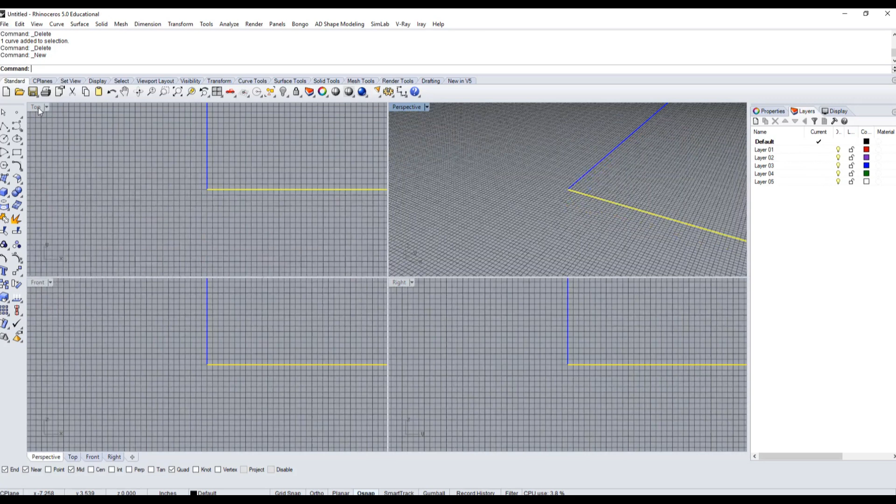I'm going to double click and work on the top viewport. I'll start by doing what we call the keyhole, which is going to be the centerpiece of my sprocket. So I'm going to draw a circle.

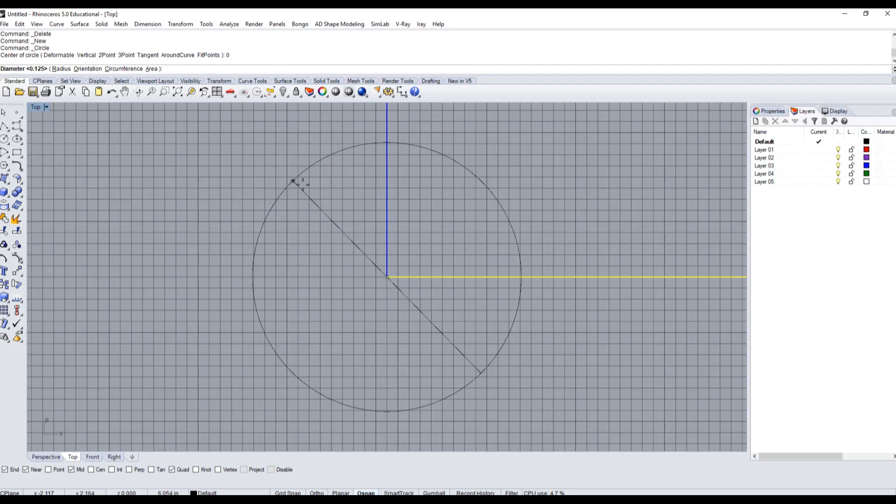I'll place it at 0, right click to position it, and now I have to give its diameter. I make sure that diameter is in bold. I know I'm working in decimals, but I can also key in fractions in Rhino, and it will understand the size.

Now for the diameter size, I know it needs to be 1/8 of an inch in diameter, so I type in 1/8 and press enter. Now I've got this diameter of 1/8 of an inch.

Now I'm going to place a point. I'll snap it to the quad and place a point here, so this point is at the quad of that circle. I'll select that point, and I'm going to use this as reference geometry, as a helping tool for my drawings.

I'm going to take this point and make a copy of it, snapping to the point or quad, same as before. I need to make it 1/16 of an inch high, so I type in 1/16 and enter. Now I've constrained the distance, so I press shift to constrain on the vertical axis only, left click to place my second point, then right click to complete the task.

Now from this point, which is 1/16 of an inch from my circle, I need to make a line that will be 1/16 of an inch wide. So I go to my line tool and start from the midpoint, choosing the third icon here, line from midpoint.

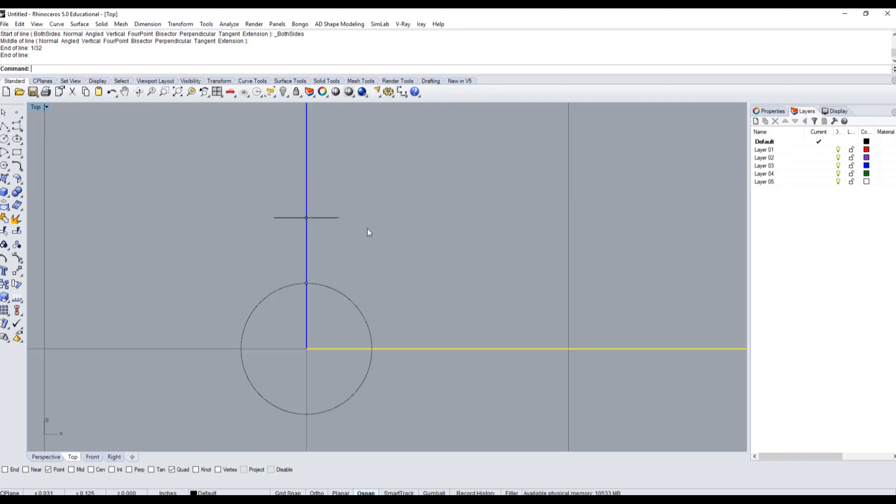I snap to point, snap to this point, and since I need to make it 1/16 wide, I put the measurement for one side, which is 1/32. Enter, then I press shift and left click to create my line. So this line overall is 1/16 of an inch.

Now I need to draw a line that goes from this point all the way down here. So I create a line, snap to endpoint like this, press shift, bring it down, left click, then right click.

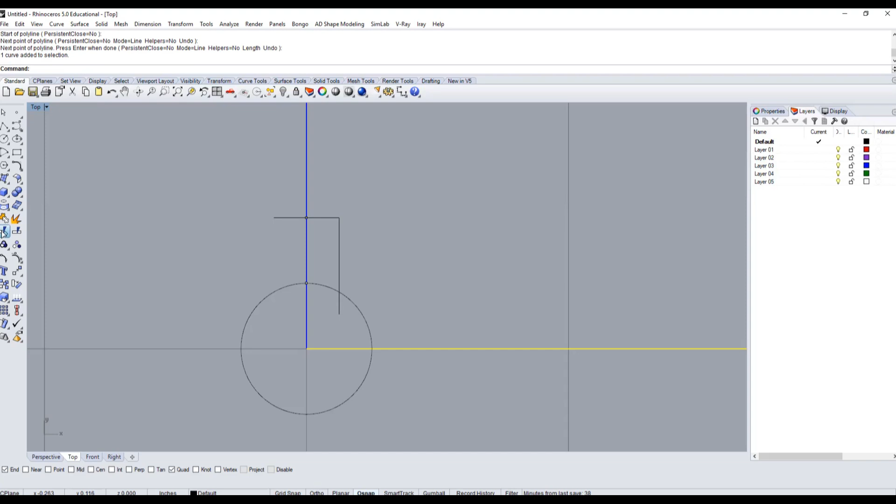Now I need to trim this line, so I go to trim, select my circle, enter, and then I remove this part.

Now I know I need to make a symmetry, so I need to send this to the other side. I go above my move icon and pull out the transformation toolbar, where I find the mirror icon. I make sure I snap to endpoint or point, grab this point, press shift to constrain on the y-axis, and left click to make a copy.

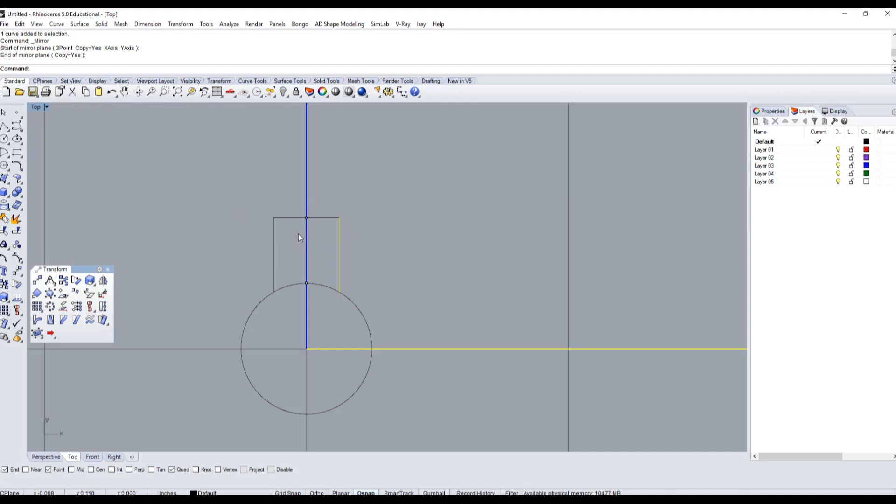Always make sure that copy equals yes. Sometimes it could be copy equals no, so you won't be able to make that copy — you'd just pass the original to the other side. So make sure copy equals yes.

So I've got these two lines, and I can remove what's in between here. I click trim, select line 1 and line 2, enter, and remove what's in between. Then I can select them all and make a join.

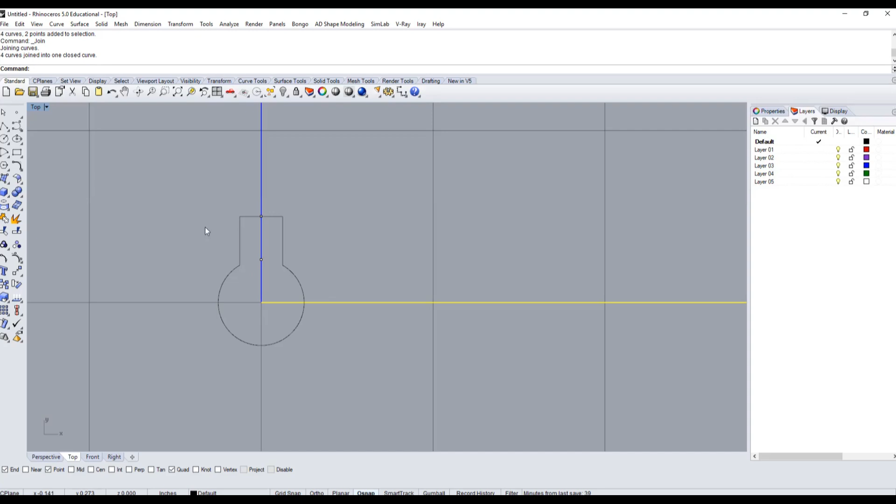So now I've got 4 curves joined into one closed curve. Okay, so that's it for the keyhole. Now I need to make the sprocket itself.

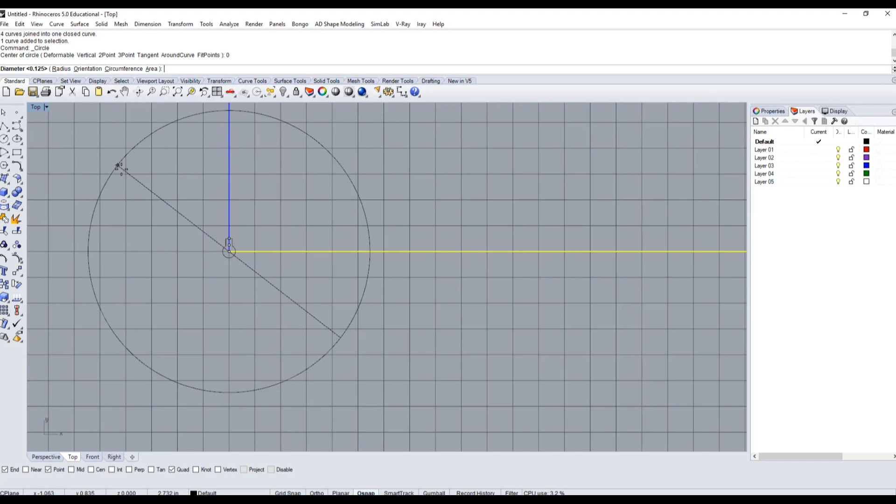I know that the sprocket is 1 inch in diameter. So again, I go to my circle. I want the center to be at the origin, so it's 0. Right click to confirm, and I need to type in the diameter, which is 1 inch. So I type 1 and press enter. So I've got 1 inch in diameter.

I'm going to start at the very top of my circle, so I can place a point that snaps in quad like this. And I'm going to draw a line that's going to start from the midpoint, and that is 1/16 of an inch wide. So basically I'm going to be making the tooth.

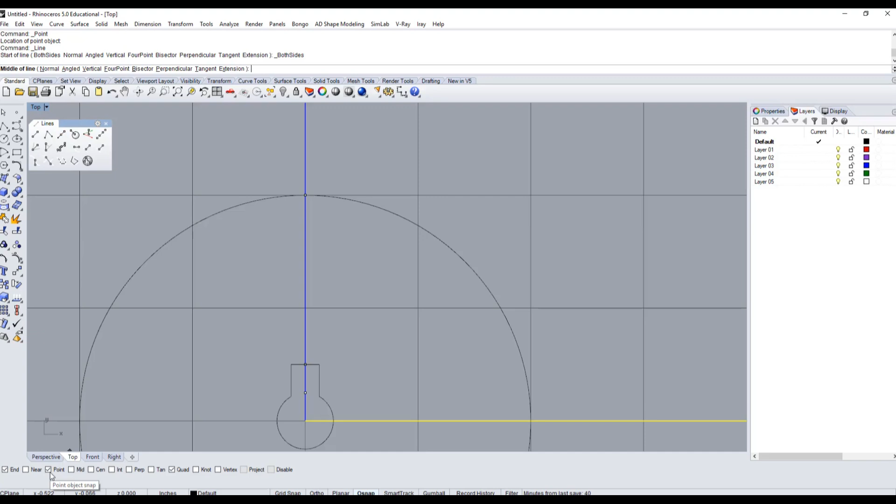I'm going to extend my toolbar for lines, and again I'm going to use the line from midpoint. I make sure that I'm snapping at point on my snapping toolbar, and I go and grab that point. And now I've got my line.

Now I need to give it a distance. I know that overall it needs to be 1/16 of an inch, but since I'm working from the midpoint, it needs to be 1/32. So 1/32, enter. Now I press shift and left click to draw my line.

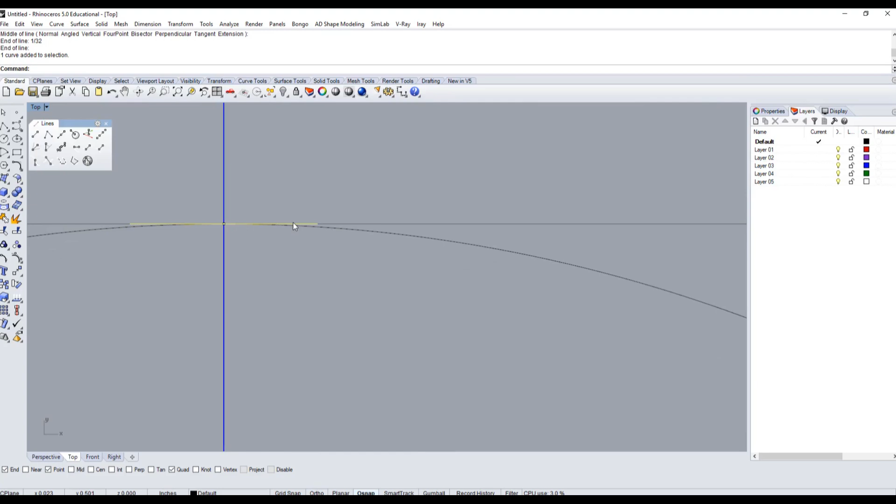It's a bit hard to see, but it's here. I can press F7 to remove the grid so that we see a little bit better. But there's the beginning, the top of my tooth. So I'm focusing on the tooth of one of the teeth of my sprocket.

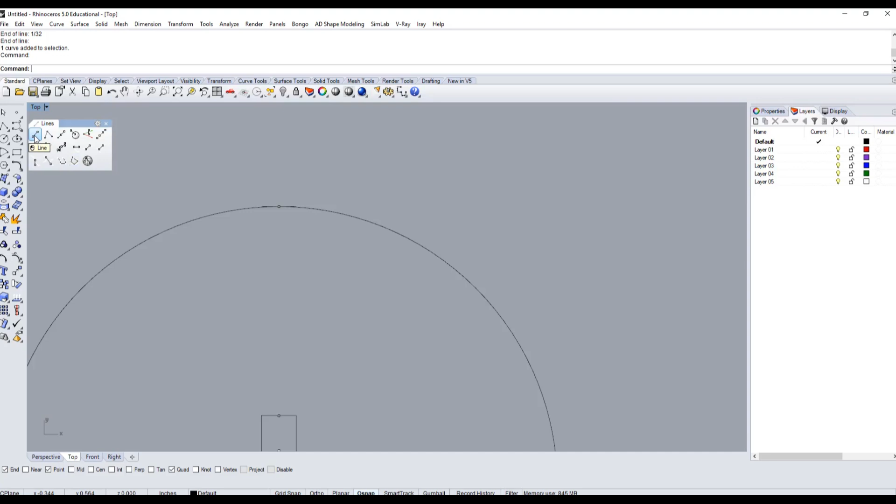Now I need to create a line that goes at an angle that is specified. It's an angle of 70 degrees, and it's also going to be 1/16 of an inch. So I'm going to use the line tool, snap in endpoint, and go and grab that endpoint here. Now I know that I need to make it go 70 degrees.

So I can use the symbol smaller than. First I just need to make sure that I'm in the proper keyboard layout. There you go. So I'm going to type in the distance first. I'm just going to say 1/16 for 1/16 of an inch. Sorry about that, a bit of a problem with my computer.

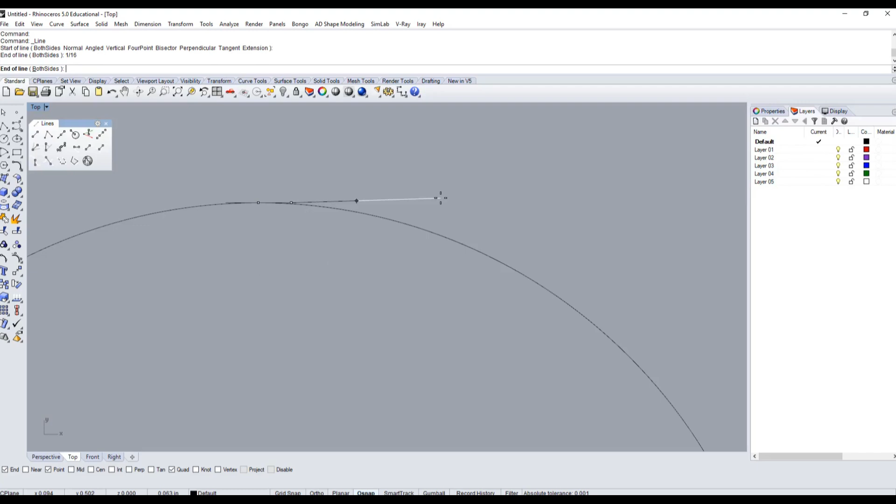So I just type in 1/16 of an inch and I right click. Now I've constrained the distance. Now I have to constrain by angle, so I type the angle by doing smaller than, and I type -70, enter. Now you can see that I'm snapping to every 70 degrees like this. So I've constrained the angle and the distance, and I just left click, and there you have it.

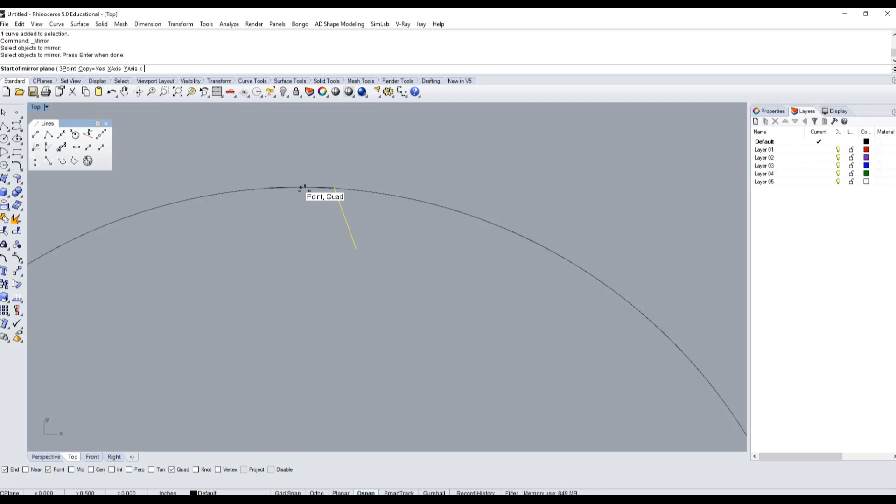I know that I have to send this copy on the other side, so it's just a matter of doing a mirror. I go back here, I do mirror, select it, right click, select my point, press shift, left click, and there you have it. So now I can select all these three lines and make join. Three curves joined into one open curve, which is perfect.

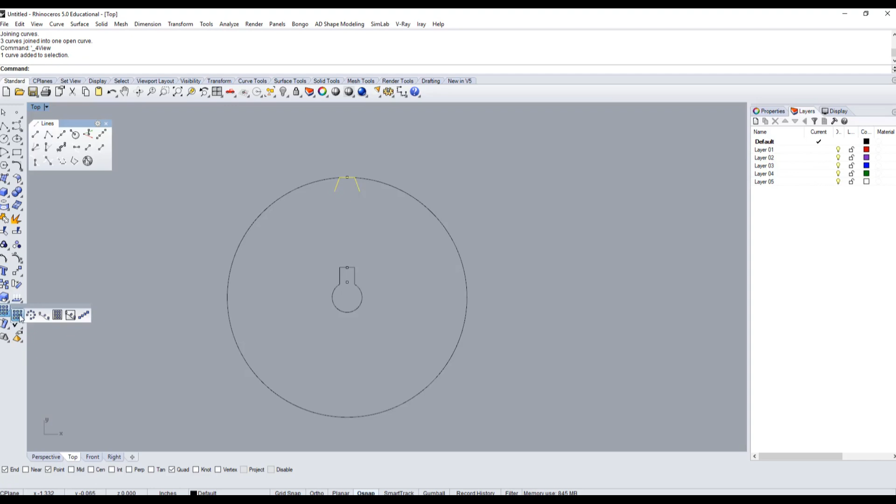Now I know that I need to make 18 copies of that tooth. So I just select my tooth, and I'm going to do what we call a polar array. I bring my cursor here, and I select this icon, polar array. It's asking me the center of my polar array, so I type in 0.

It's always the same thing, so we can see the little white dot that shows up here. That's the origin point. And I want 18 teeth, so I type in 18 copies for number of items, and I right click.

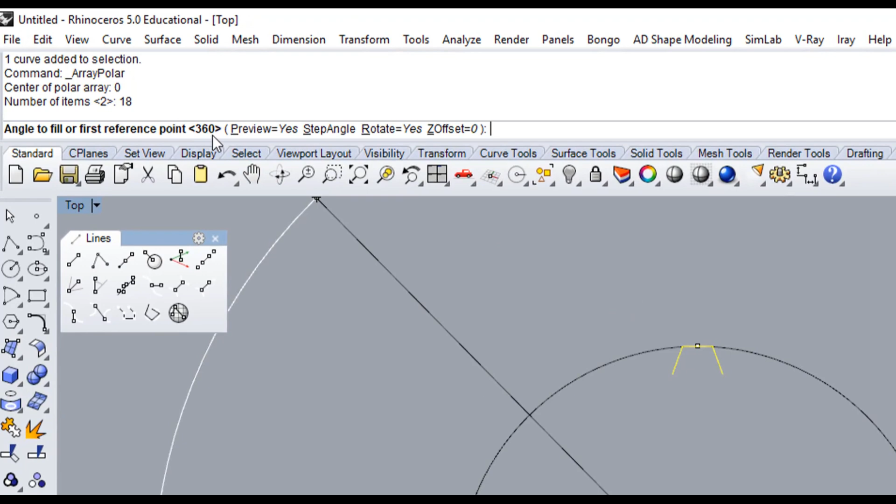I'll make sure that in bold it's 360 degrees. Make sure your angle fill is 360. Okay, that's fine. I just right click again, and I have a little preview in white. This is what it looks like with 18 teeth. I'm happy with it, so I right click to confirm and freeze everything. Now I've got my 18 teeth.

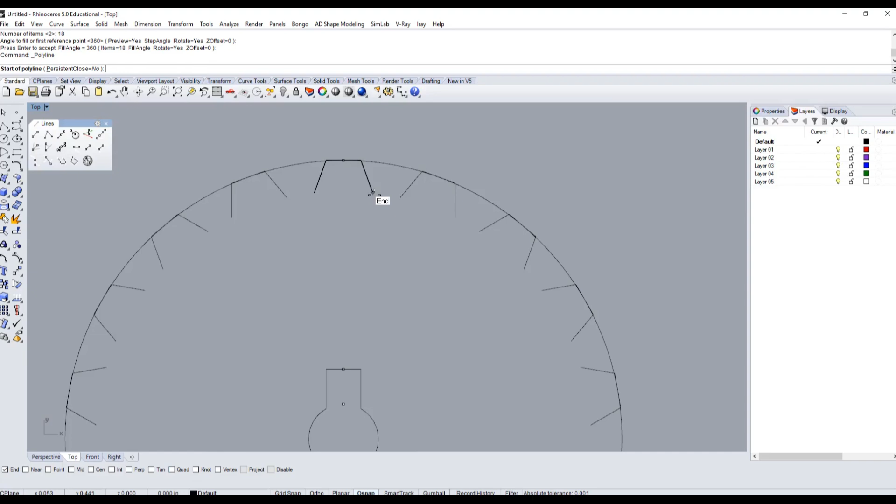Now it's just a matter of connecting the dots. I'm going to use the line tool, make sure endpoint is checked on my snapping toolbar, and I go and grab this endpoint and that endpoint, then right click.

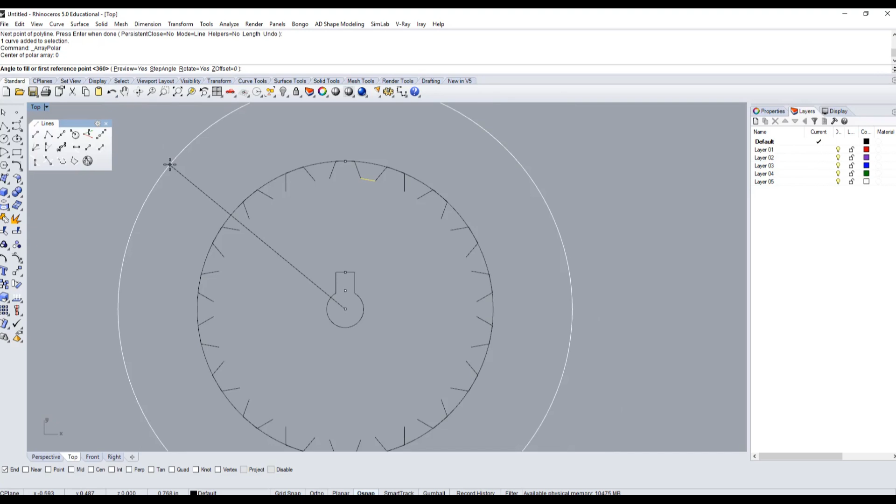Again, I make another polar array. I go back here, select polar array, center of my polar array is at 0, so I type in 0. How many numbers? I'll keep it at 18. I right click, make sure it's 360 degrees. That's fine, I right click again. Here's a little preview. Now I freeze it, right click again, and there you have it.

Now I can select everything and click join. Everything that is connected will join automatically like this. And I've got my keyhole, I've got my sprocket, and I don't need this - this is just a construction line.

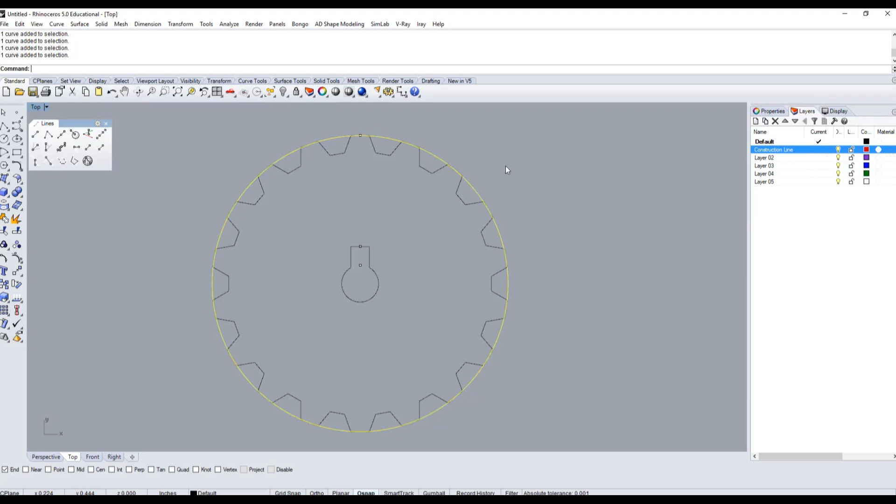So it's good practice, a good habit - I can double click here and type in construction line like this, and I select that construction line. I bring my cursor above the layer construction line, right click, and change object layer. Then I can hide it by turning off the light bulb like this.

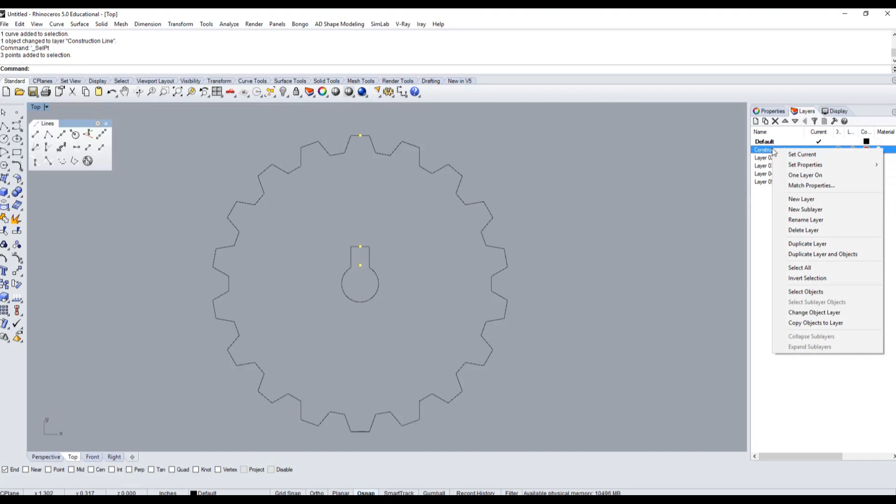I can also select all my points because I don't need them. I go under my selection filter and select all the points, and do the same thing - bring my cursor above construction line, right click, change object layers, and turn it off.

Now it's just a matter of doing a simple surface. I can go into my perspective view, and now I'll show you some simple surfacing functions. I've got fully flat curves, and they're both closed curves. I can select both of them like this.

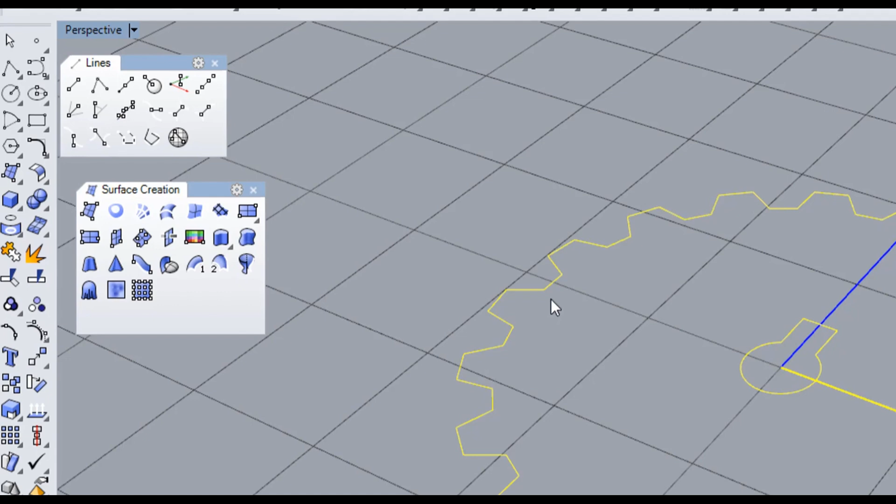If I bring my cursor here, where it's written surface from 3 or 4 corner points, and expand this toolbar, these are all my tools needed for creating surfaces - it's called the Surface Creation Toolbar. The one I want is the second icon, called Surface from Planar Curve, which is the case here since they're closed curves and fully planar. So I just click on this.

It's a bit hard to see because I'm working in wireframe, but something happened. I just need to make sure I go from wireframe to shaded mode, and I can see my surface. If I want to give thickness to my surface, I just select that surface.

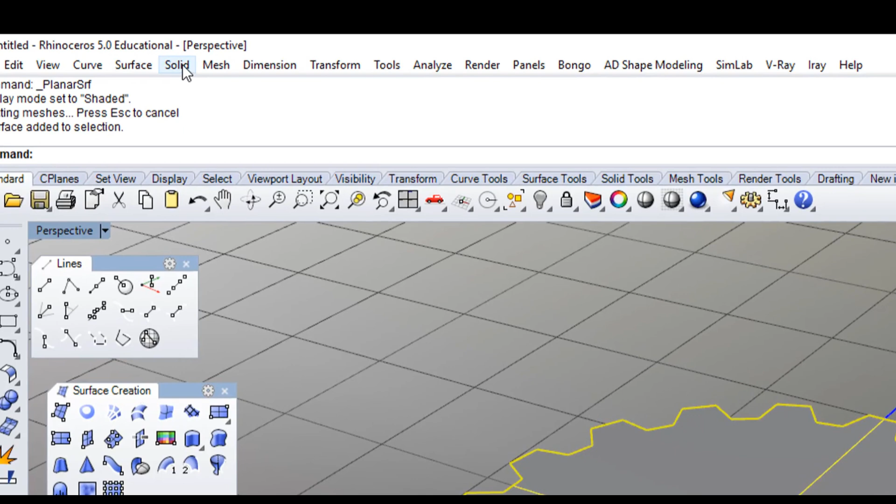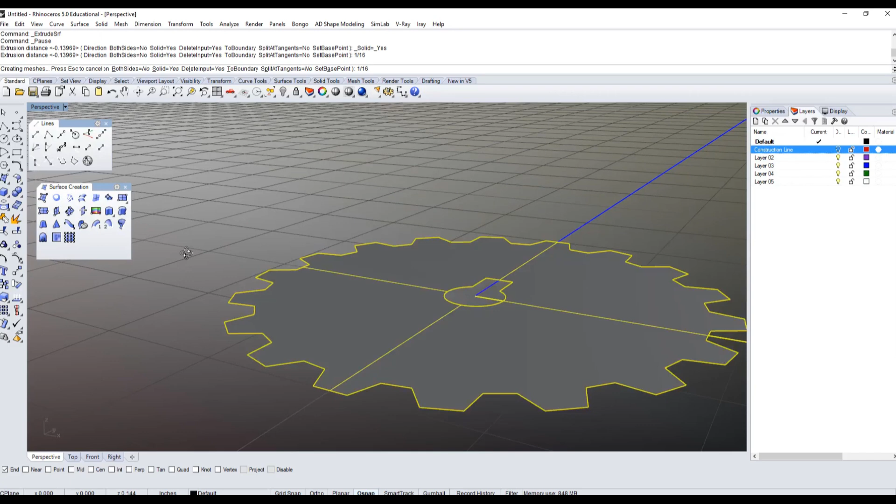So to give thickness to it, this time I'm going to create a solid - going from surface to solid. I can go, for example, here on my solid menu, left click on solid, and extrude the surface in a straight fashion like this, giving it a thickness. I type in the extrusion distance - let's give it like 1/16. So I type in 1/16, press enter, and there you have it - you've got your thickness of 1/16 of an inch.

That's how you use some of these tools, so try and practice it for yourselves. Use the same dimensions and repeat it until you get it just right. Okay, and we can move on to the next chapter. Thank you.